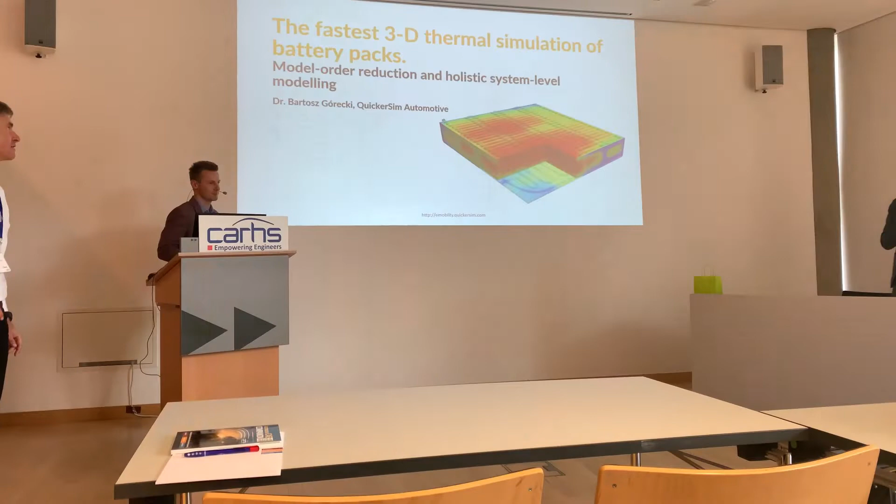Okay, perfect. So the name of your company is QuickerSim. It is QuickerSim.

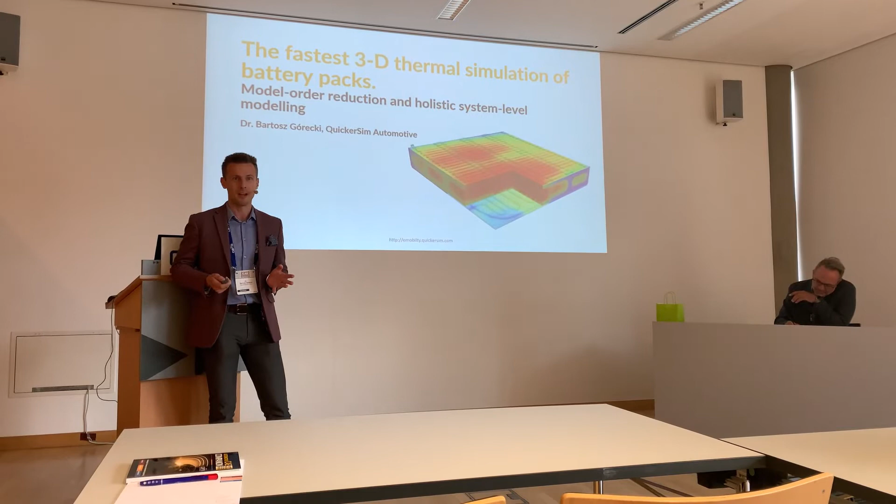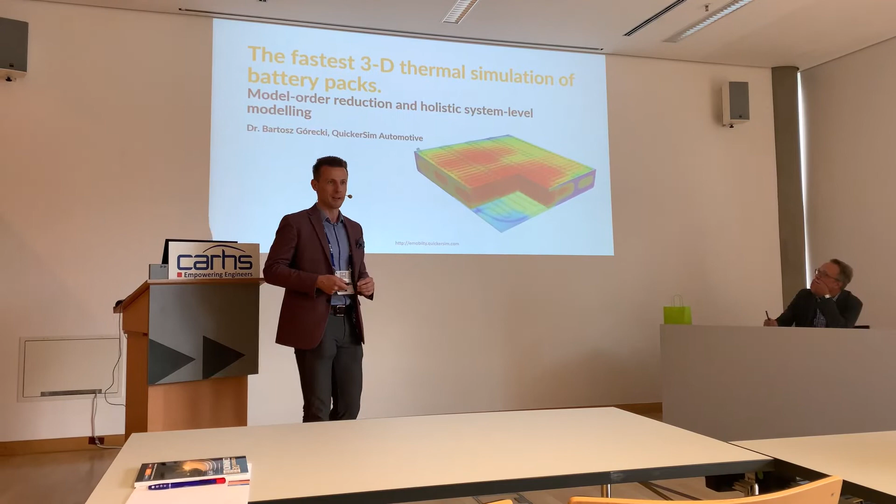I think the title of the presentation is also a bit provocative because it says the fastest 3D thermal simulation model of battery packs, and there's always a good question: what is the best, the fastest, and should you really trust words like that? But I hope that you will be pretty much convinced with this presentation that at least it's not the slowest one you can find.

Our company is called QuickerSim, and we've always been focused on solving these simulation challenges quickly. Let's be quick this time as well, and let's start with the conclusions. This should get some attention because we're just before the lunch break, and it's difficult to get your attention probably.

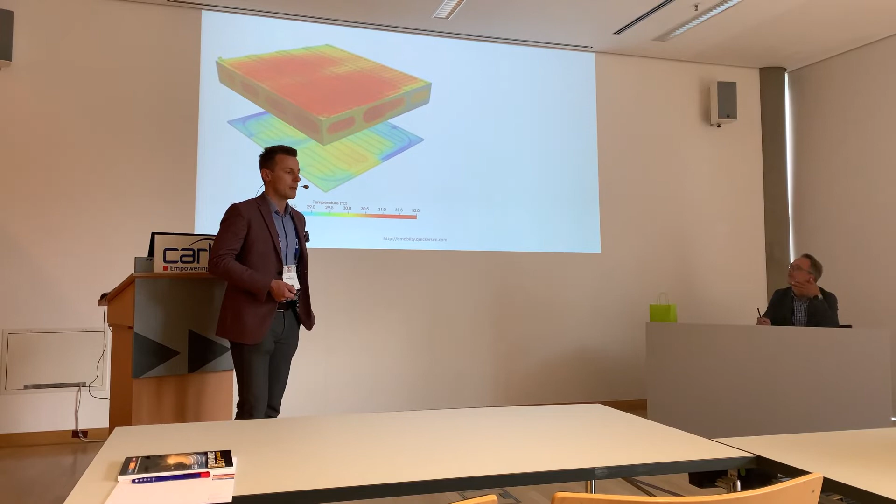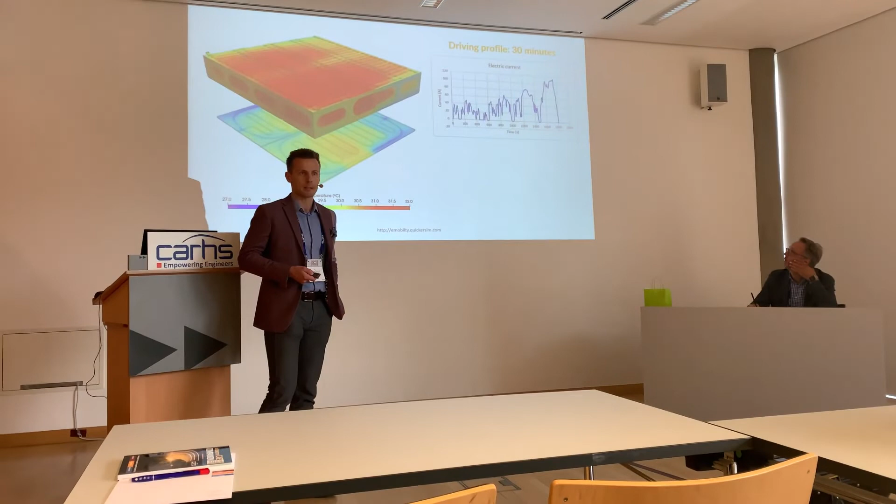The conclusion is that if you're interested in thermal modeling of a battery pack like this—I call it already pretty complex—and you want to take into consideration all the geometrical details of the battery pack, and simulate 30 minutes of the driving profile, so having a three-dimensional thermal simulation of a battery pack for half an hour of driving...

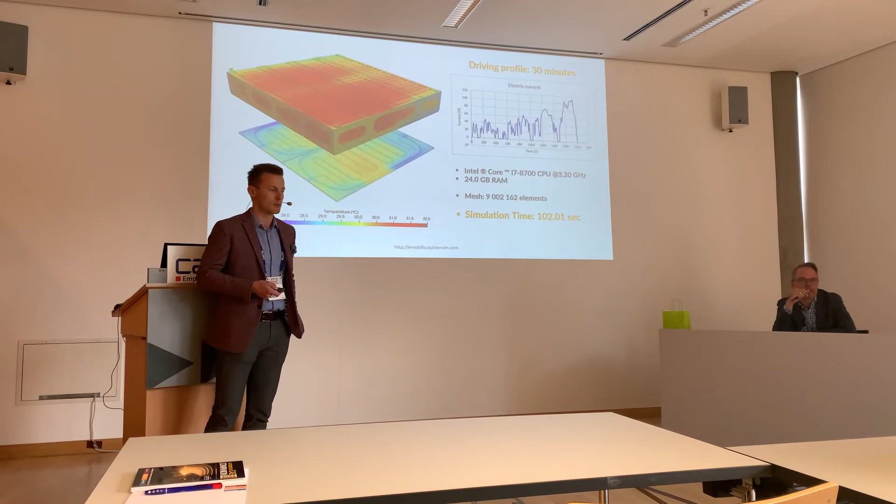Let's have a look at how long that should take if you take a pretty usual desktop computer and generate a mesh that consists of 9 million elements. What would you expect? Three years, or even more. It's actually 102 seconds, like 1.5 minutes. I will try to explain in the next slides how we do that and how that's possible.

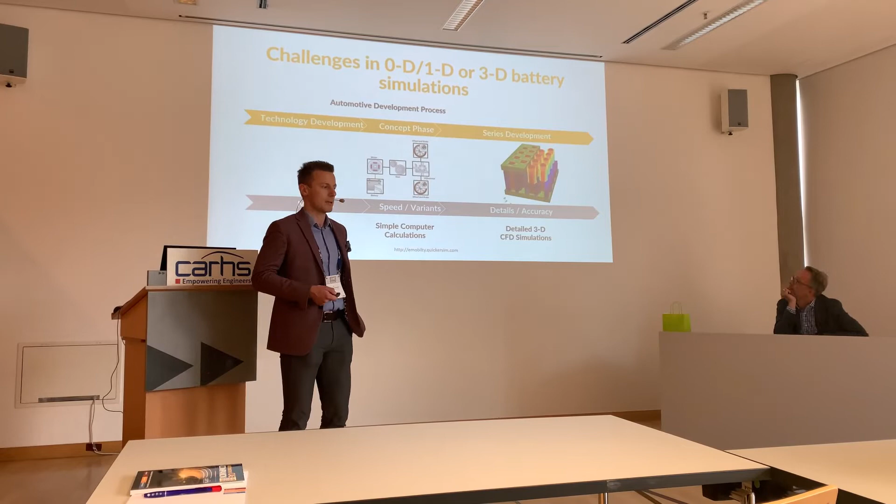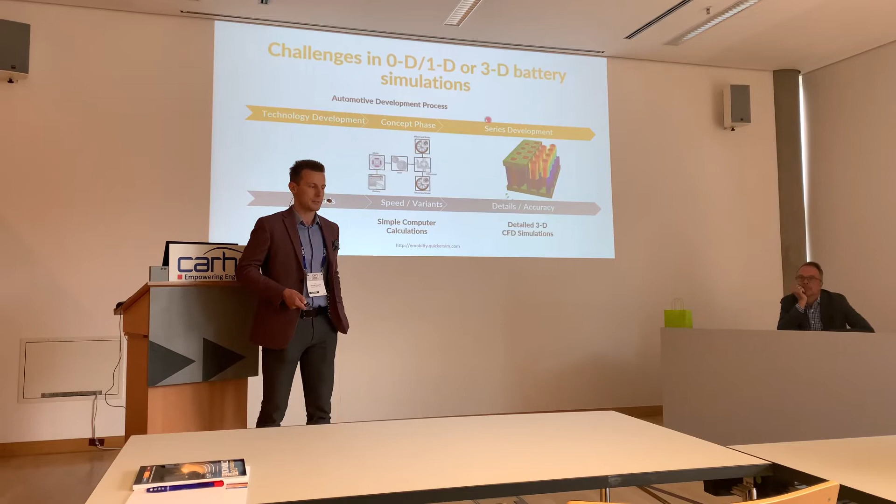Let me first relate to what is the CAE Grand Challenge of battery simulation. When speaking to different OEMs and our customers, what we see very often is that the challenge is really connecting things that happen in the concept phase—here we usually speak about 0D, 1D simulation—with something that happens in series development, where accuracy mainly comes into play, and there's a large need for 3D CFD predictions.

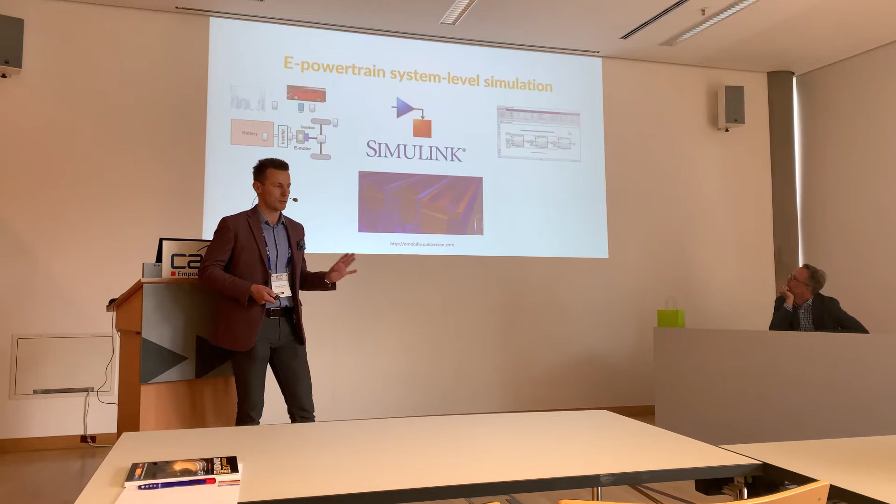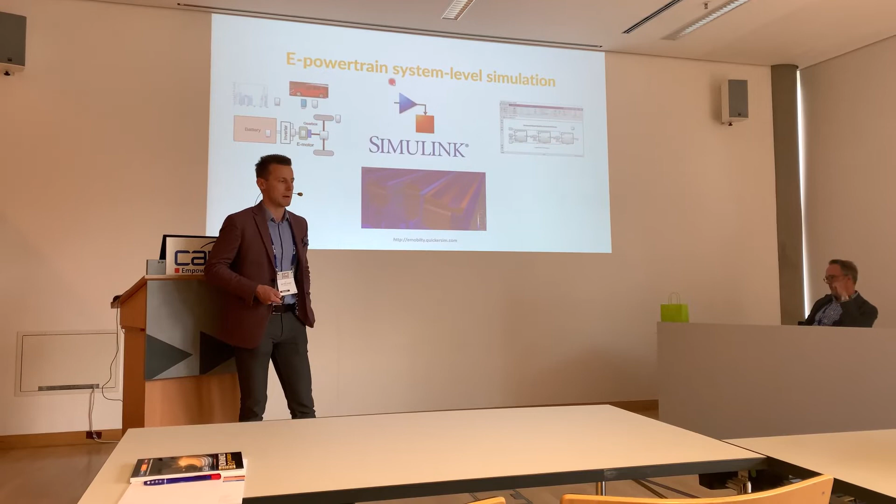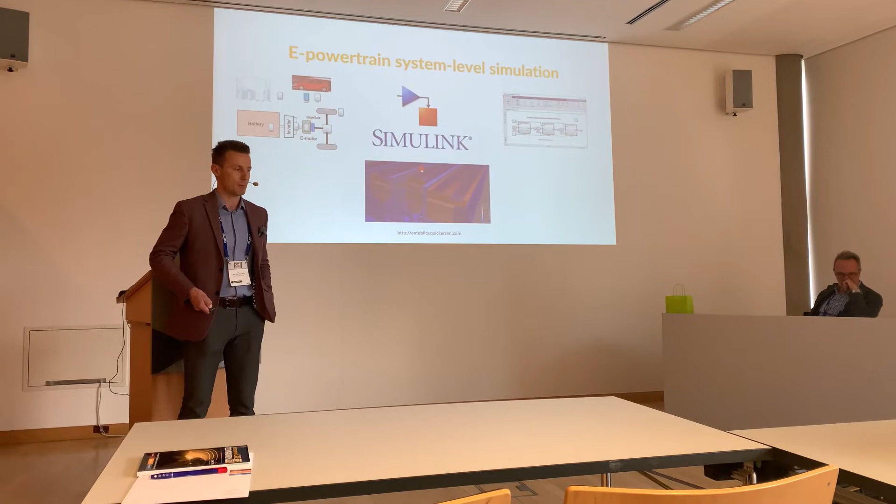But to be honest, that's not the largest challenge. The largest challenge will come in a minute. However, when talking about 0D, 1D simulations, we typically speak about electric powertrain system-level simulations. Very often the OEMs work with MATLAB and Simulink. The challenge is how you should relate to your CFD results if you design the system—you work with meshes like that—how should you input the data from your very detailed 3D CFD simulations into system-level simulations of the whole electric powertrain. I hope we do have the answer to that.

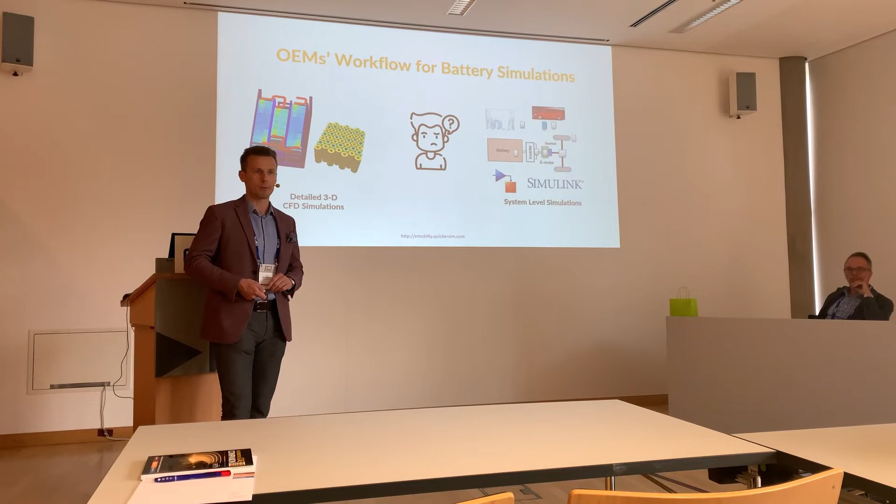The story we heard from one of the German OEMs we currently cooperate with is that they obviously have departments working on these 3D thermal simulations. They also have people working on system-level simulations, and the largest problem is how you should couple one of the approaches with the other one.

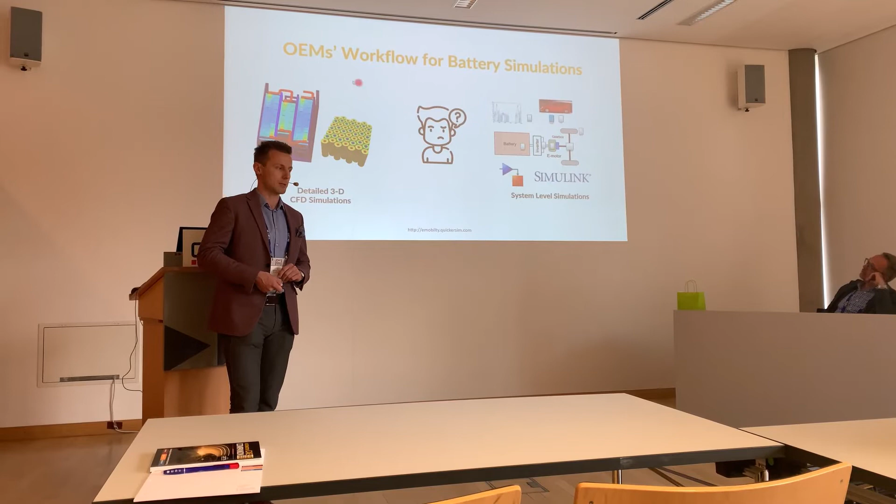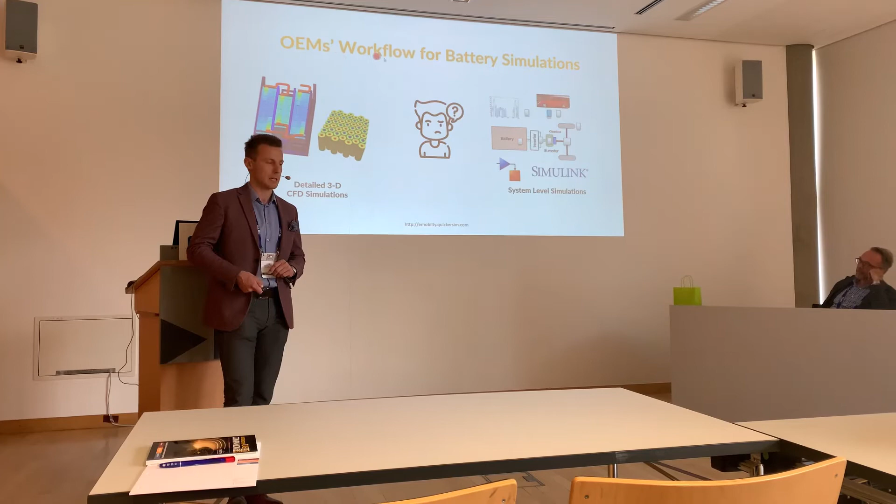What they've shared with us is that when they do have the results of these simulations, it takes 2 to 3 months of manual work for the engineer to translate the results from 3D simulations into anything that can be used on the system level with proper accuracy, because when they just take it, there's things like response surface models, etc.

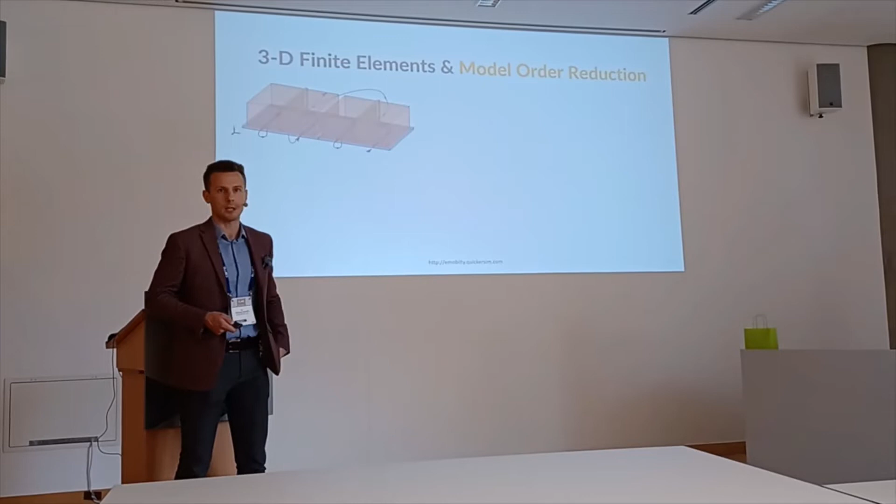We could use one more, maybe very similar technique for reducing the model that I'm going to present right now. Let's focus first on what a typical CFD solver would do if you were in the position to solve a thermal transient simulation. Typically you'd start with the CAD geometry, then generate some mesh, probably much more difficult than that, and you'd expect to get temperature results like that.

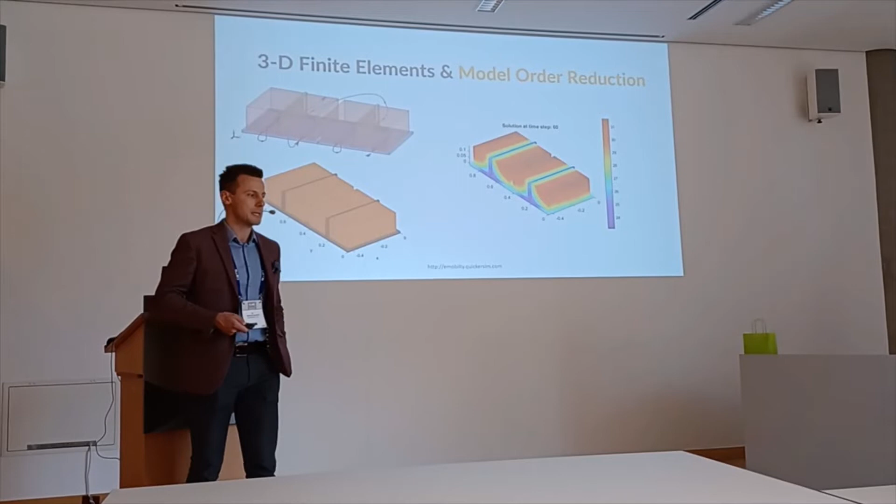So what happens underneath is the CFD solver needs to solve the partial differential equations for heat transfer. It also needs to solve the Navier-Stokes equations for flow if you've got any kind of flow inside, in cooling channels, if you've got active air cooling, etc. It typically uses one of two discretization methods: either the finite volume method, like ANSYS Fluent or STAR-CCM+, or the finite element method to discretize these partial differential equations, as most structural solvers do.

If we're speaking about the finite element method, then you need to represent the temperature at every instance in time, at every node in your mesh, and you use, for example, linear shape functions to approximate the solution between the nodal values.

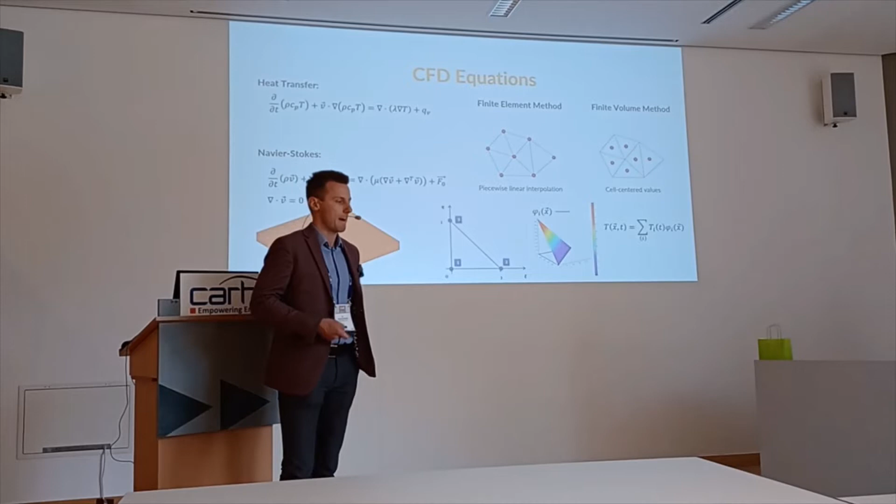In the discretized version, we've got the matrix notation with the mass matrix representing thermal inertia, the convection matrix representing convective phenomena, the diffusion matrix representing heat conduction, and the heat source, which when we're talking about battery packs would typically represent heat generation in the cells.

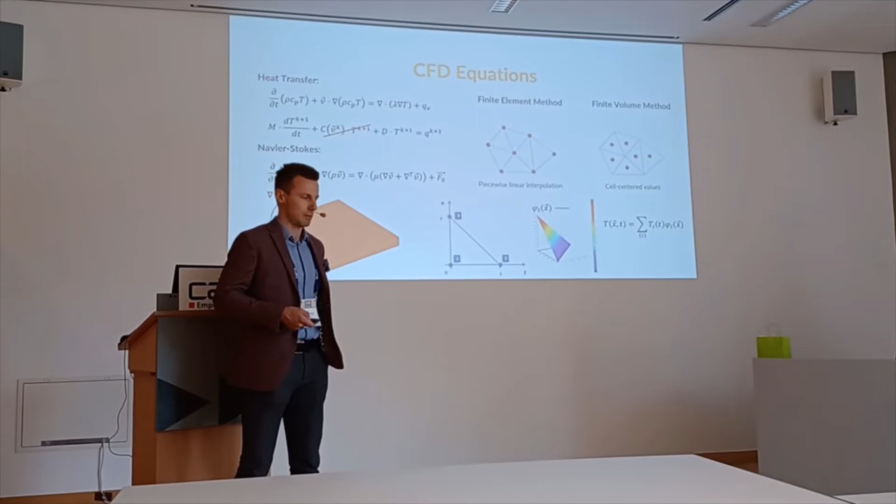Just for the sake of simplicity of explanation, let me drop this convective term. We do take this into account, but it's much more difficult to understand within just a few minutes, so let me drop that and show you the idea that is generally behind the model order reduction.

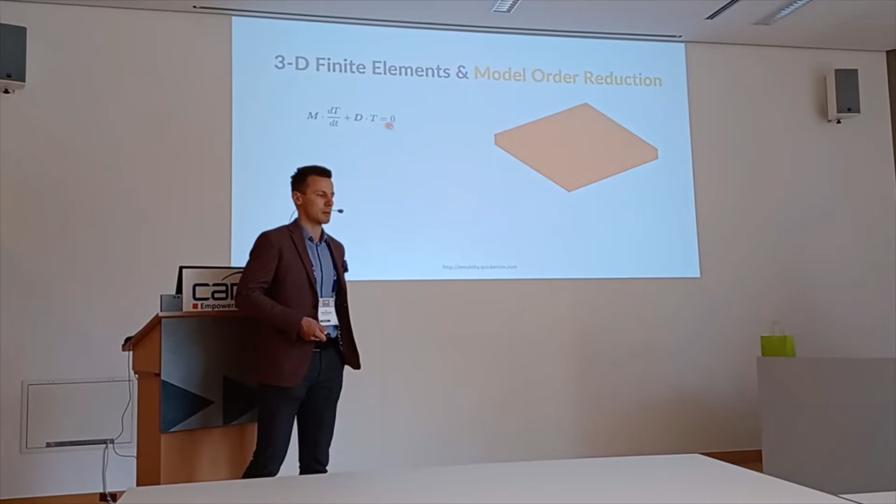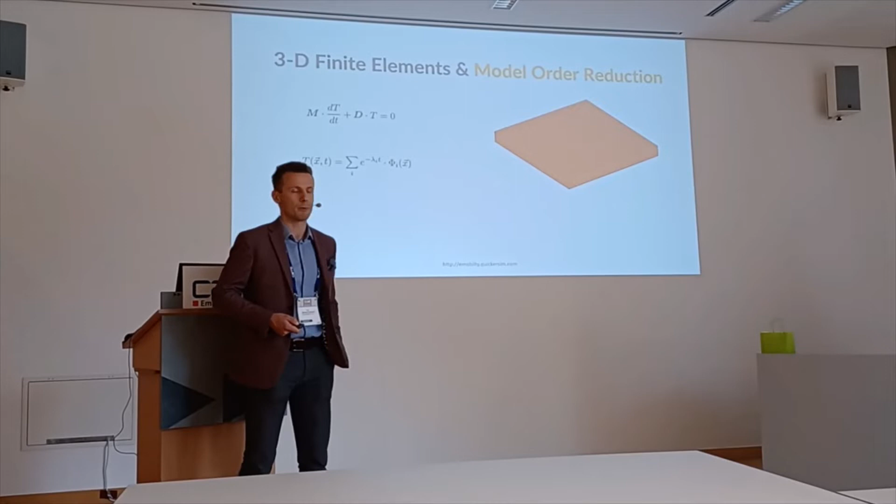So let's limit our problem to just having the thermal inertia and heat conduction. To be honest, the heat source on the right-hand side does not change anything in the approach, so I've just omitted that. If you remember the trick from partial differential equations, you can simply assume that you can represent your function as a decomposition.

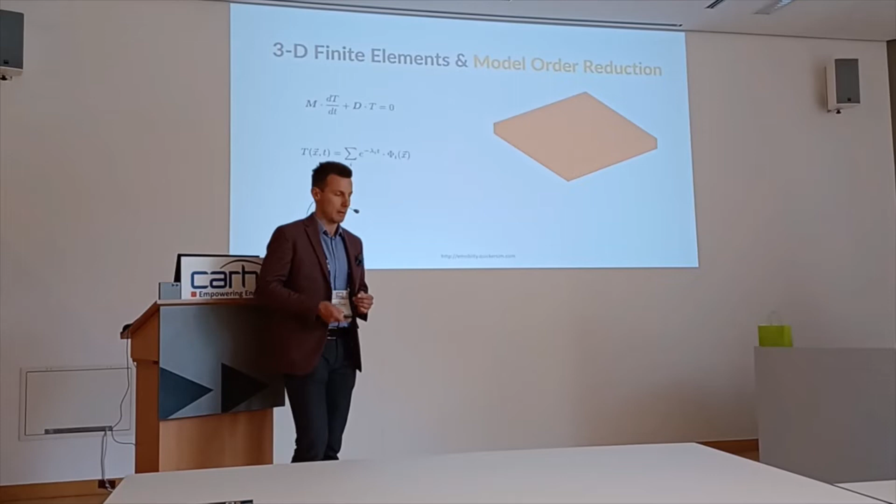You represent your function as a series, where you decompose your function into a product of a function that depends only on time and a function that depends only on space, and you substitute this into the original equation. What you end up with is the generalized eigenvalue problem.

We exploit this concept to run our model order reduction. To be honest, that's something you should be very familiar with, especially those of you who work with finite elements in the structural context, because you do that very often for structural simulations.

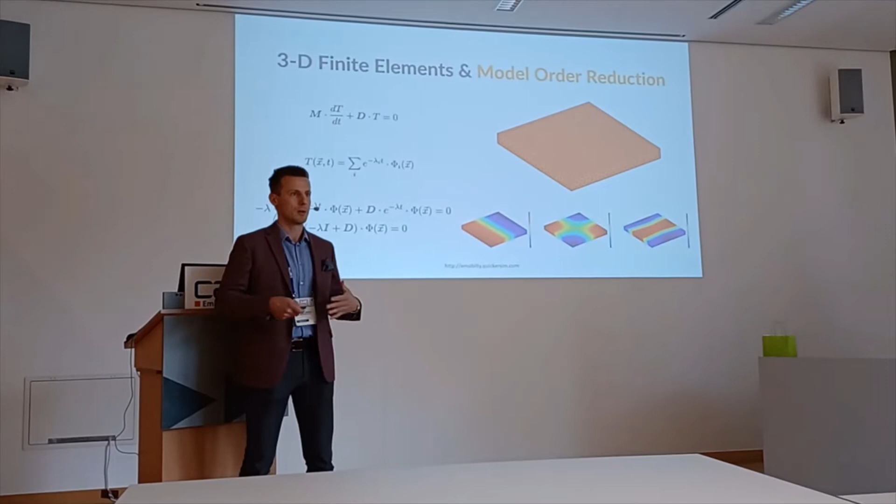If you want to calculate vibrations for dynamic response, you usually do not calculate the finite element response explicitly. What you very often do is generate the eigenmodes and eigenfrequencies of vibrations, and you solve your dynamic problem in this eigenvector space.

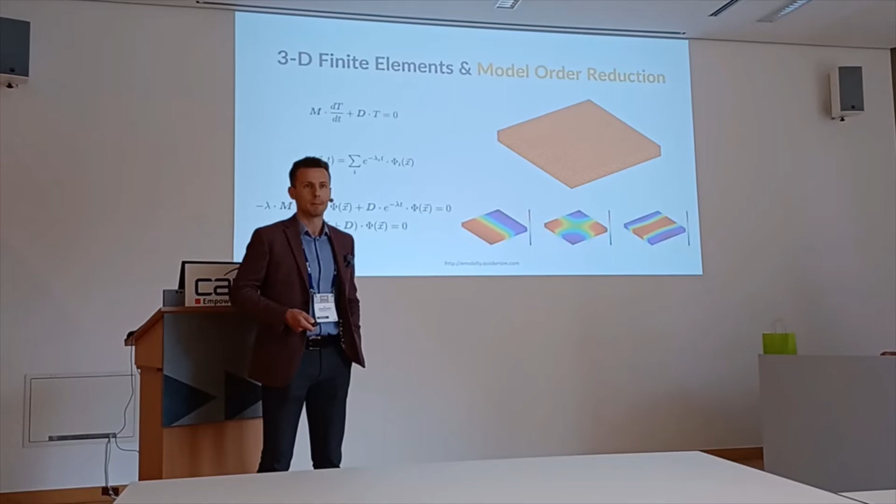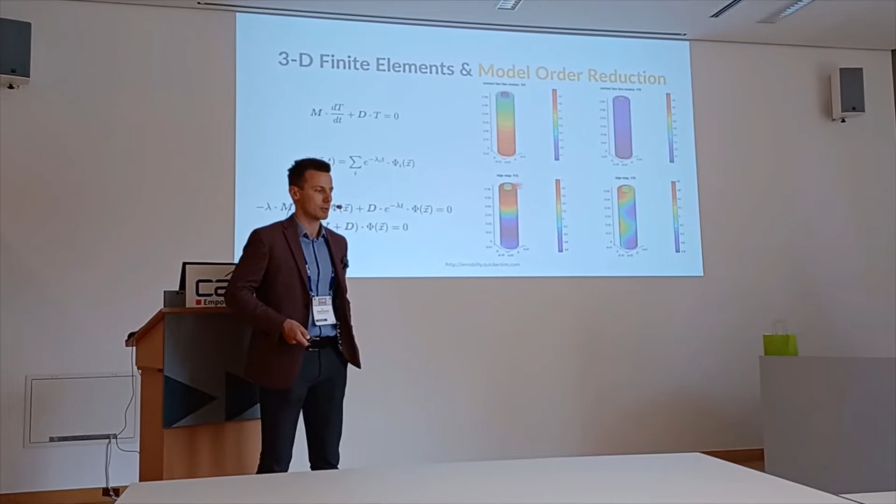And we do the same, but for thermal problems. What you can see here is just the depiction of a couple of exemplary eigenvectors, or thermal eigenmodes if you wish, something that does not exist in physics, but you can generate them mathematically and use them as the algebraic vector space for model order reduction.

So basically, we use such eigenvectors to approximate all the 3D temperature distributions that can occur during the time evolution of the battery pack simulation.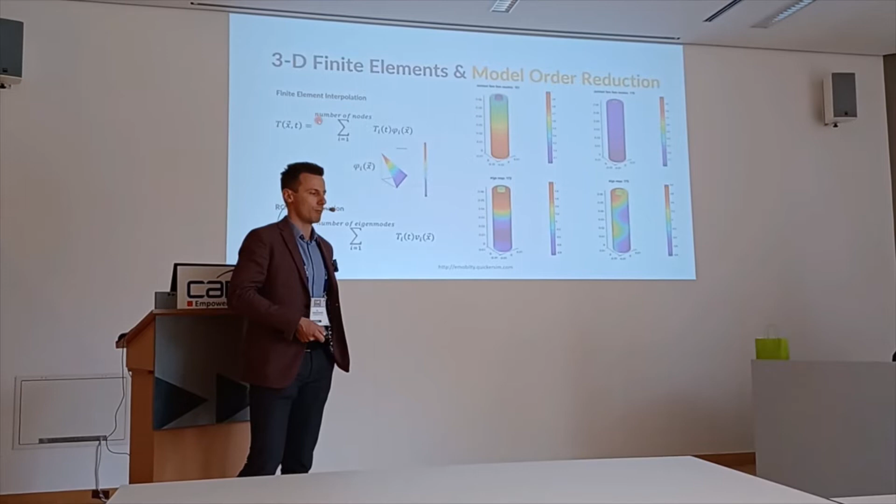What's the advantage? The advantage is that we vastly reduce the number of degrees of freedom for which we need to solve. Typically, the finite element code would need to solve for all the temperature values at all the nodes in the mesh, and it would need to do that for every time step.

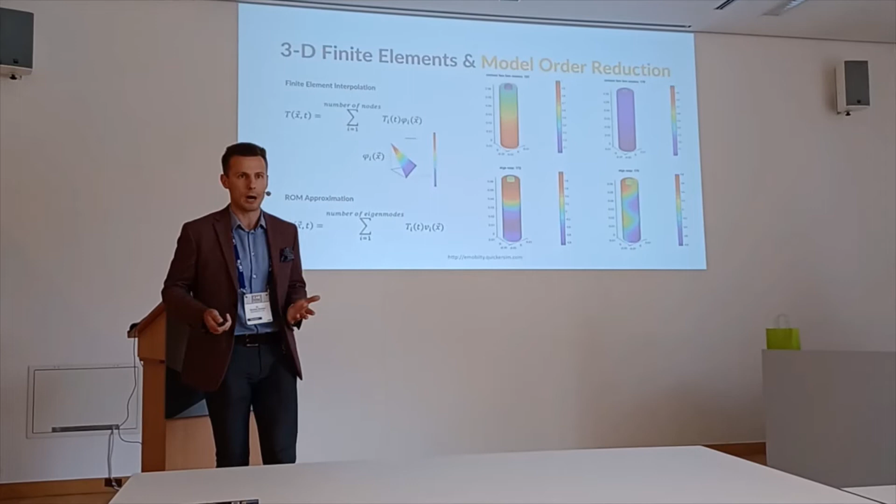We need to do that just for the number of eigenmodes that we select, and we can freely select how many eigenmodes we want to take per component. Well, then we get many more eigenmodes because we've got many components, but it's usually like 100 times up to 1000 degrees of freedom less than the original formulation.

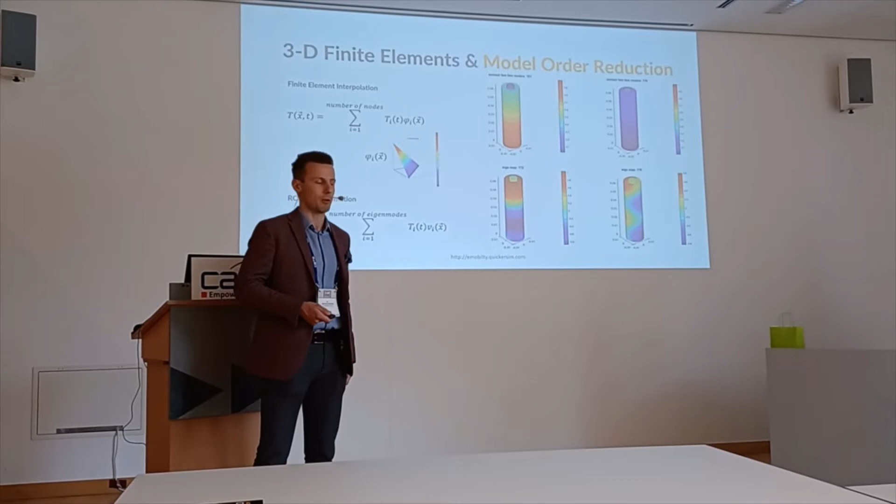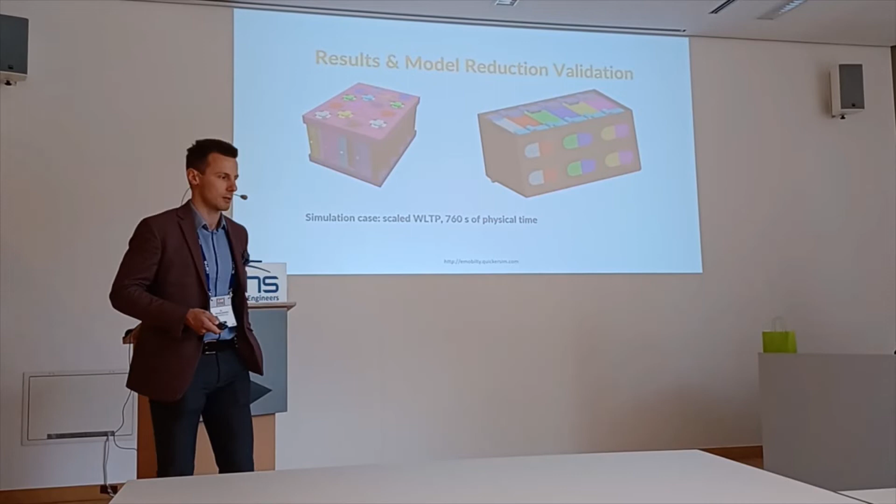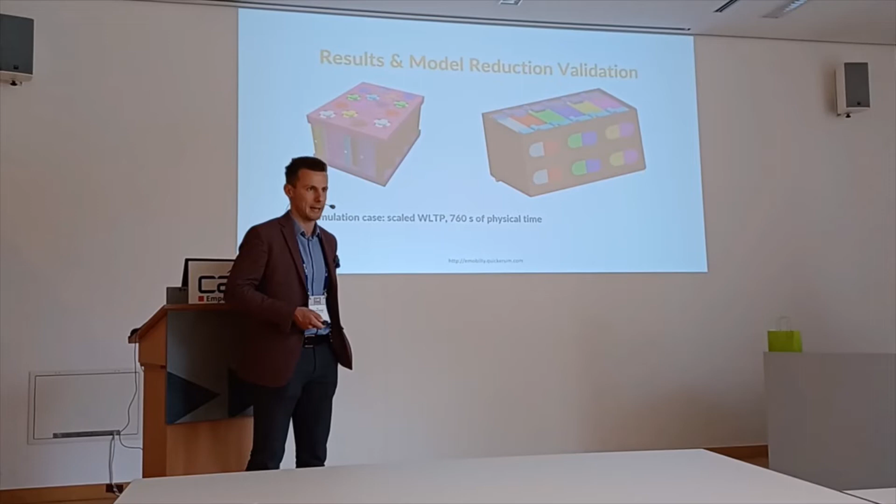What are the results? The results are probably the most important part of this presentation, and I will underline a couple of things here. We've started with really a toy problem. I would say it's not an automotive battery pack, it's an academic case to just study the numerical accuracy.

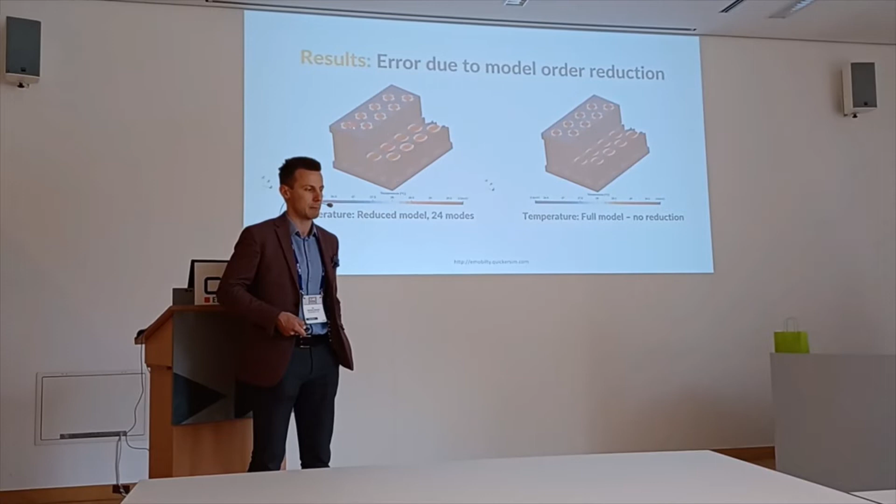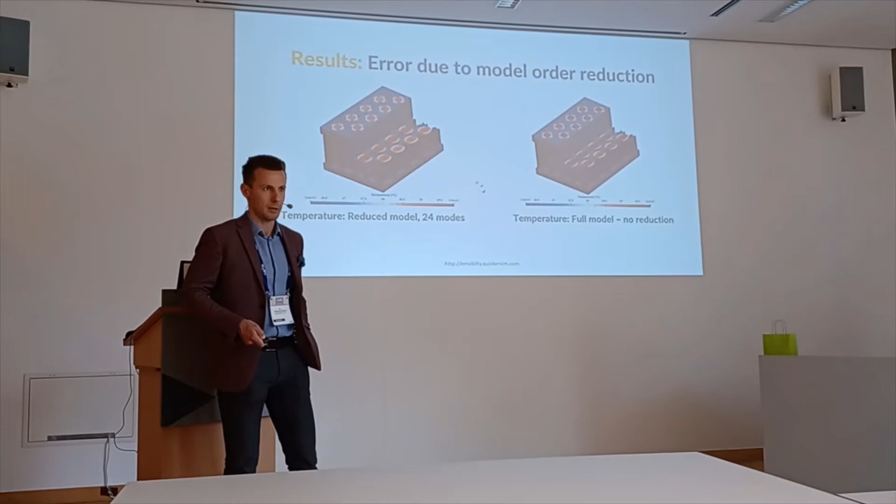We've checked the error that we introduced due to having the model order reduction. On the right hand side, you can see the full finite element model simulated without any model order reduction. On the left hand side, this one with model order reduction, with 24 modes per component, so for each cell, for each mechanical component, probably altogether like 1000 degrees of freedom here. Well, you will see differences. This red color here is different from this red color here, but I wouldn't say these are large discrepancies.

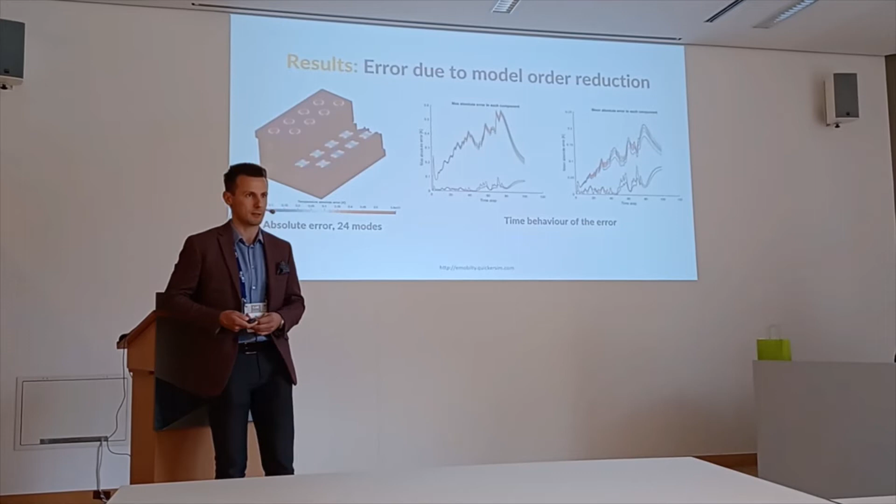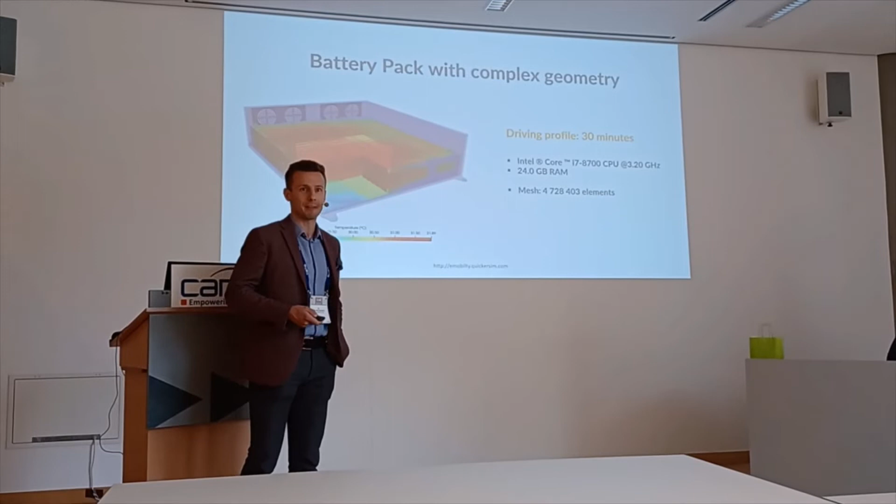What's next? Let's take a more complex geometry. If we take that, I have already spotted at the beginning during the conclusions phase. We do have 3 different meshes, so I've taken the medium one. Right now it's not 9 million cells, it's almost 5 million elements. And let's see what happens.

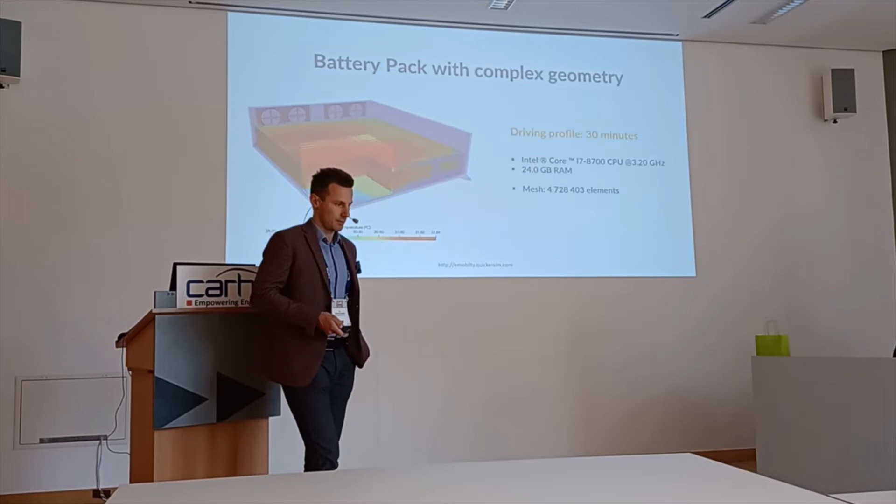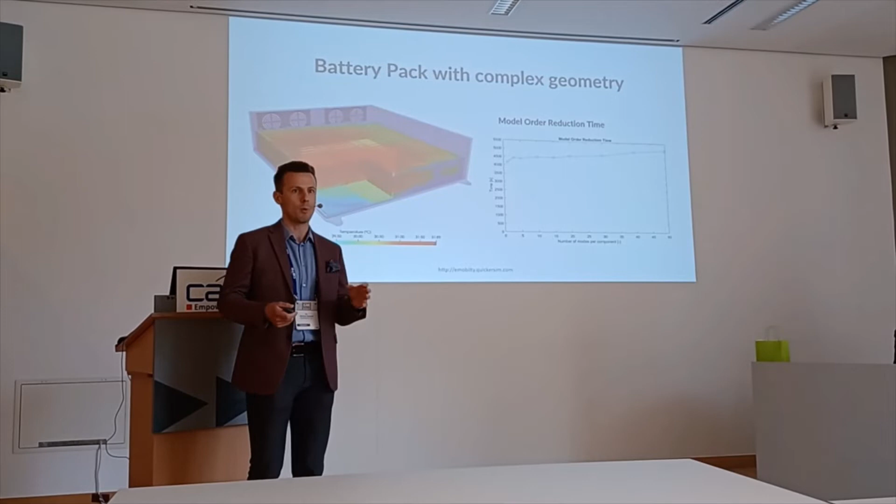First of all, you need to agree that we need to have some kind of pre-computation phase. Every time after you change something to the mechanical design, all the mechanical properties, it's like if you have designed a new battery pack, you need to run model order reduction. But if you want to change the boundary conditions, the driving profile, the external temperatures, etc., something that happens to the operation, you don't need to run this model order reduction phase.

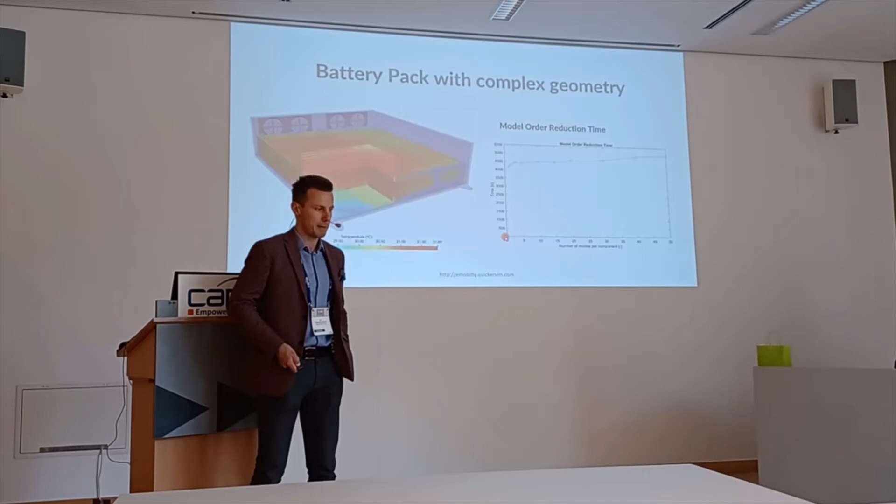So pretty much you do that just once after you have modified the battery pack, and then you're ready to use that. How much time do you need to spend for that? Depending on the number of modes that you select, well, usually something between 1 and 1.5 hours. That's something that you need to spend in advance.

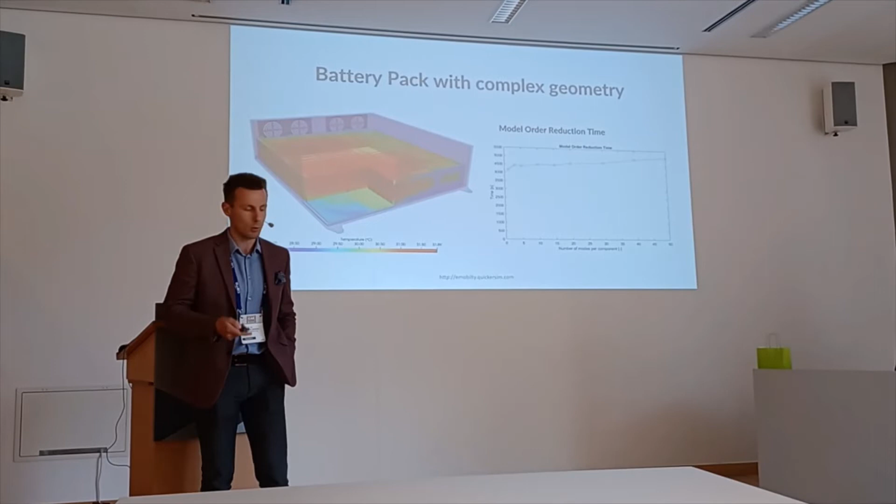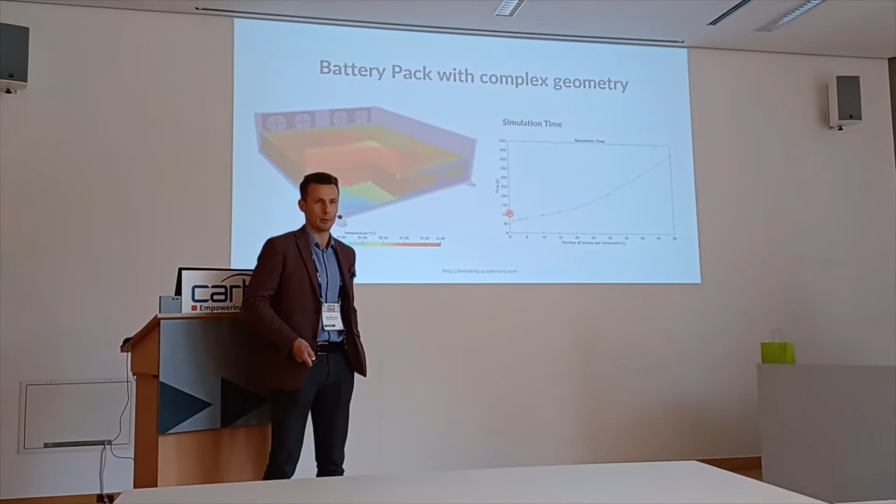But how quick is it later on? If you want to run the simulations, depending on the eigenmodes per component that you select, well, the simulation time for half an hour of the driving profile varies from, let's say, 60 seconds to maybe 400 seconds.

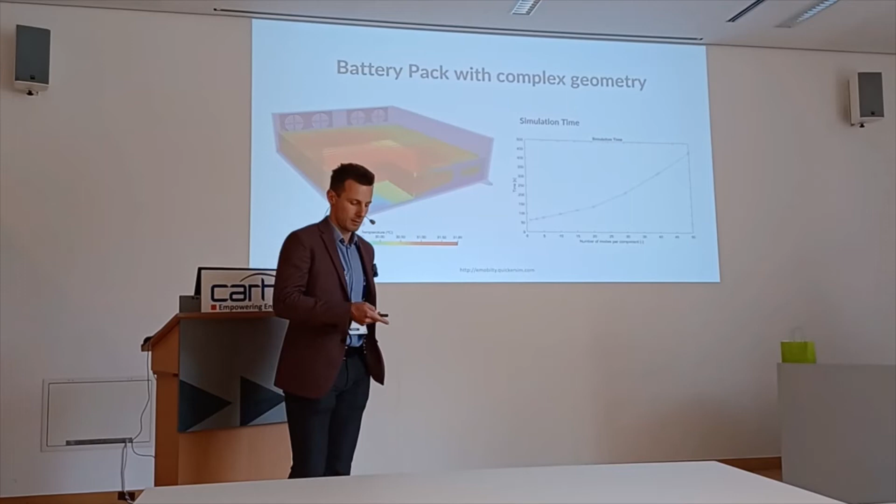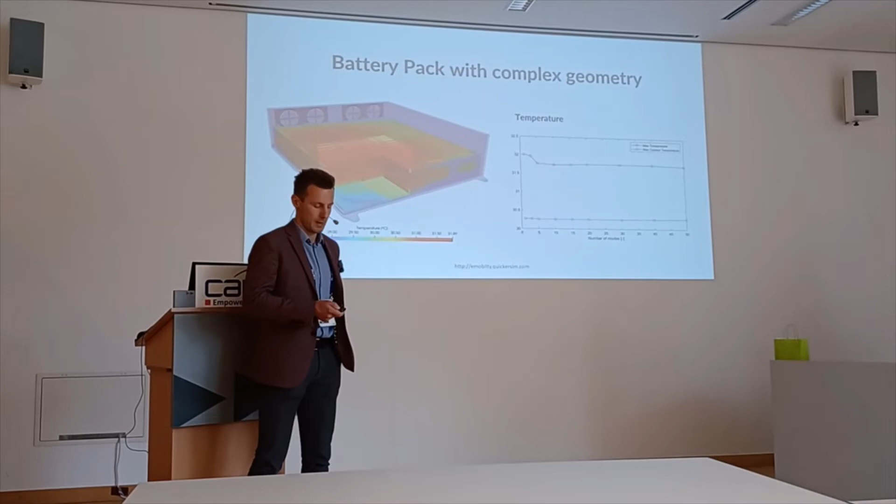These are the results that we got for this battery pack. In many situations, we are below real time. If we've got very complex geometries, maybe we're a bit above real time. But compared to 100 CPUs on a supercomputer and 2 days of computations or even more that a CFD run needs, we still need to use that, it's an advancement. What is important, then we need to have a look at, can we trust this result?

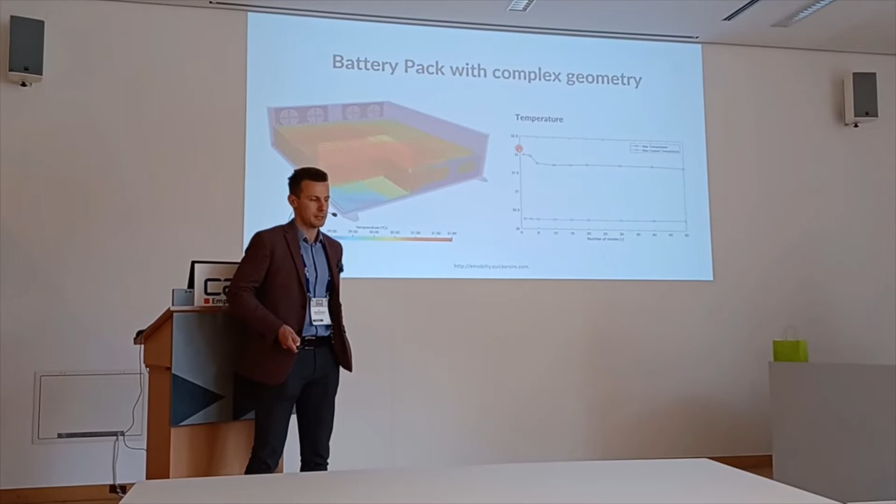So, well, if we take too few eigenmodes, well, the differences are not large, but there is some discrepancy. So usually we need to take 10 or more eigenmodes per component, and then we are pretty much sure that this result should be fine.

What's next? What's the impact of the mesh? We've compared what happens if we take 3 different meshes. One of them is pretty coarse, the other is a medium one, and the finest is 9 million elements. What's the impact of the mesh? Well, visually, you probably will not see any differences between the temperature maps. If you have a look at the values, they are very, very much the same.

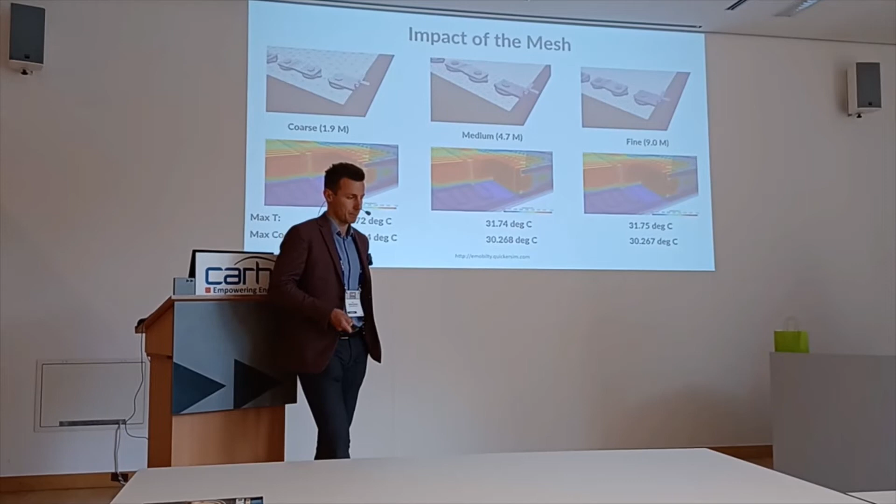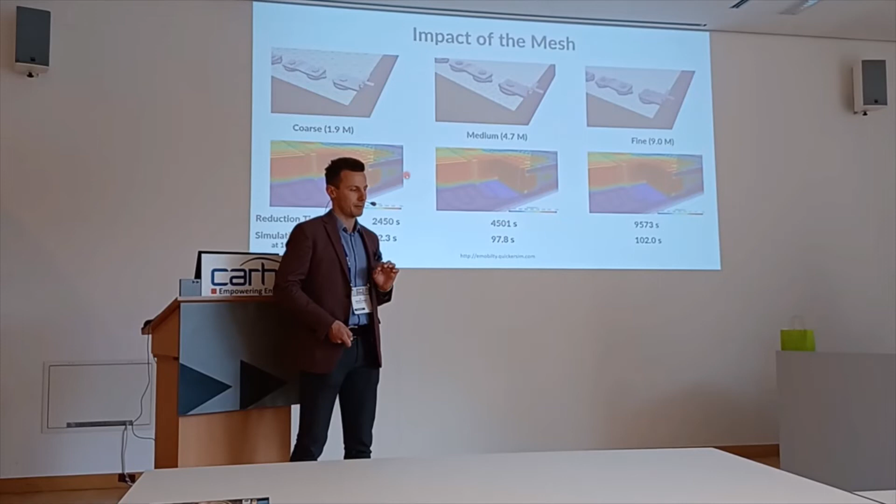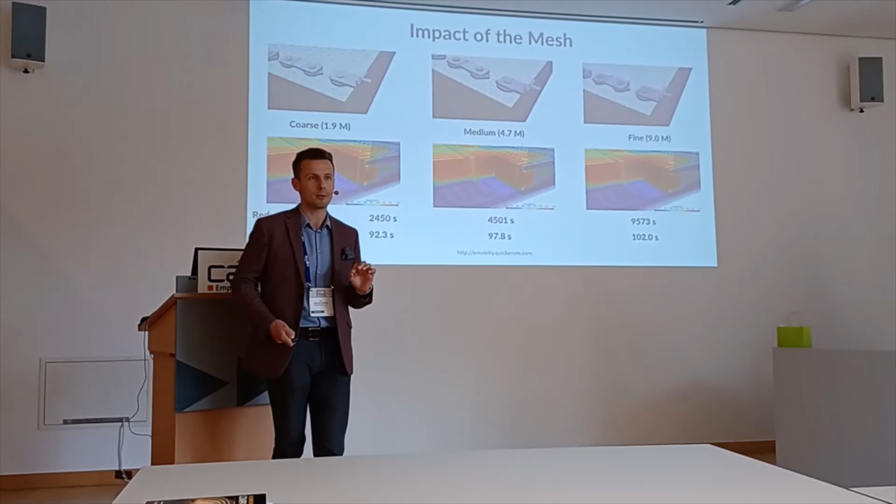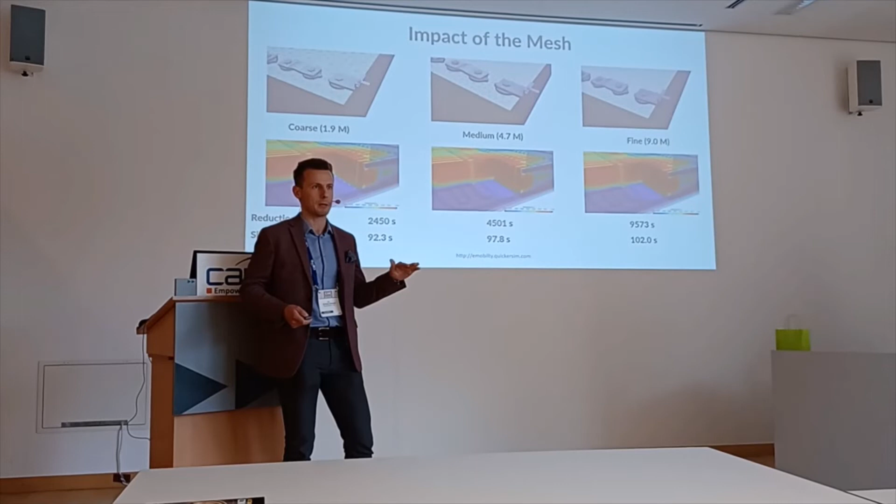What happens if we compare the simulation time? One important thing: if you get a larger mesh, the model order reduction time will be longer. You need to spend more time for a larger mesh. However, once you have reduced your model, because you work in the eigenvector space, you basically have more or less the same number of degrees of freedom. We do some tricks on the contact, so this might not be exactly the same, but it's pretty much so. Even if you want to investigate plenty of geometrical details in your mesh, you end up with a simulation time that is actually almost constant.

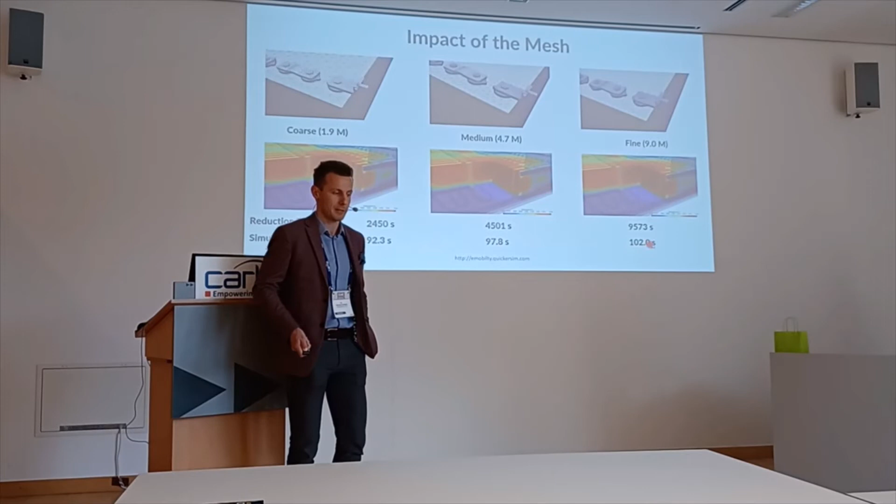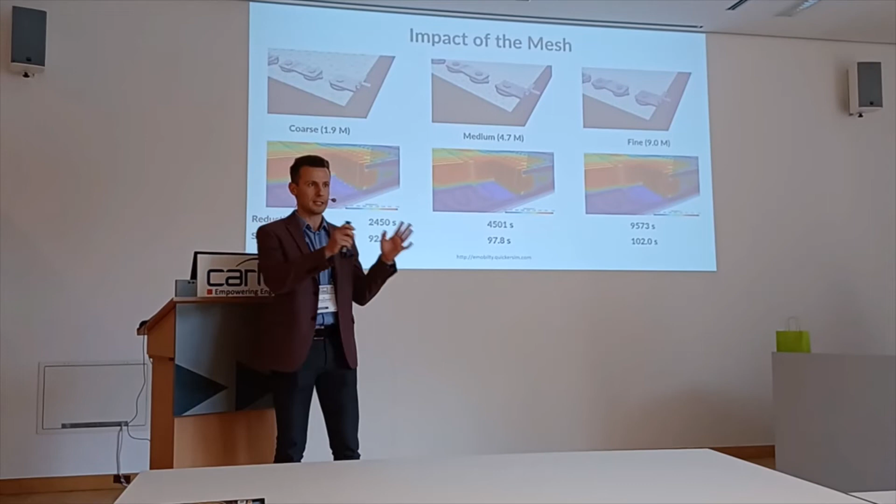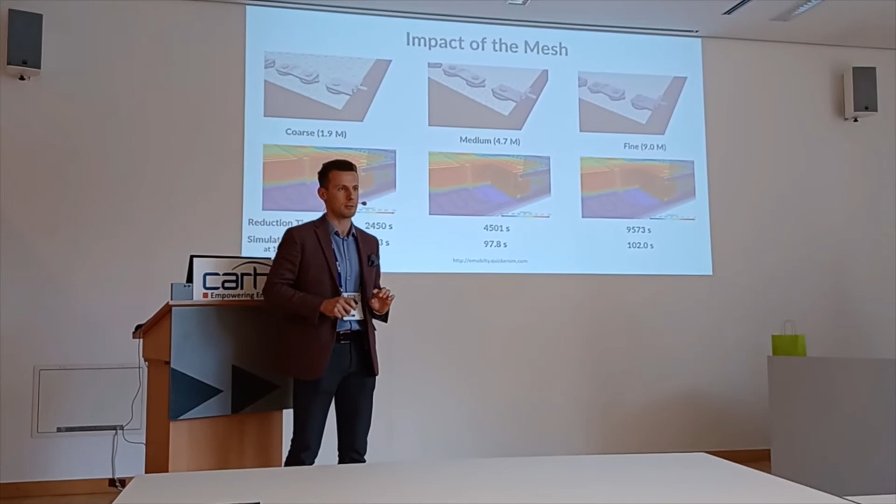What it means is you can build a 3D simulation model based on the CAD geometry, regardless of whether it's a very detailed design or a 3D design in the concept phase, and you can take it to a very small Simulink block in the MATLAB Simulink simulation and run system level simulations, having the full 3D fidelity and accuracy of the results.

Verification and validation. At the beginning of the development of this code, we cooperated with Solaris Bus and Coach. Some of you might know Solaris—they're not the largest bus manufacturer, but they turned out to be the largest electric bus manufacturer in the European Union, having produced approximately 1,000 electric buses. All of them monitor every second, 50 to 100 parameters. So what we did with them is compare the results from QuickerSim, our software, with their online monitoring of the batteries of the buses and experimental testing as well. We also compared that against simulations in ANSYS Fluent.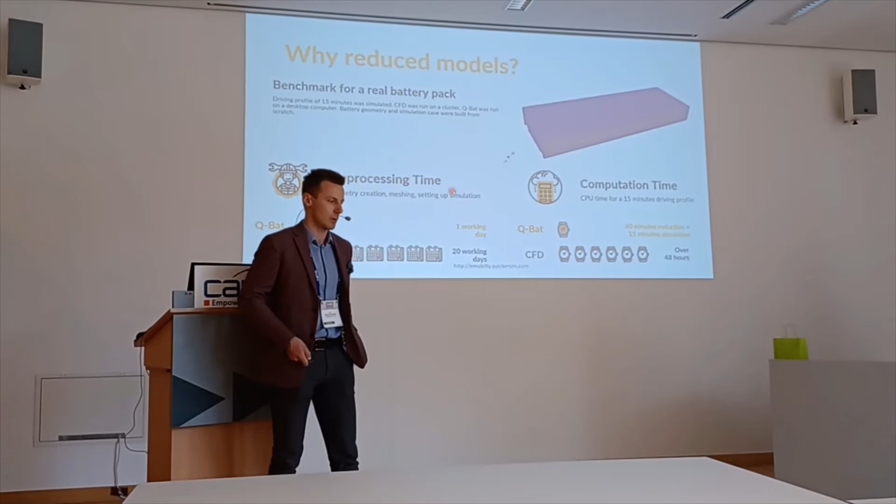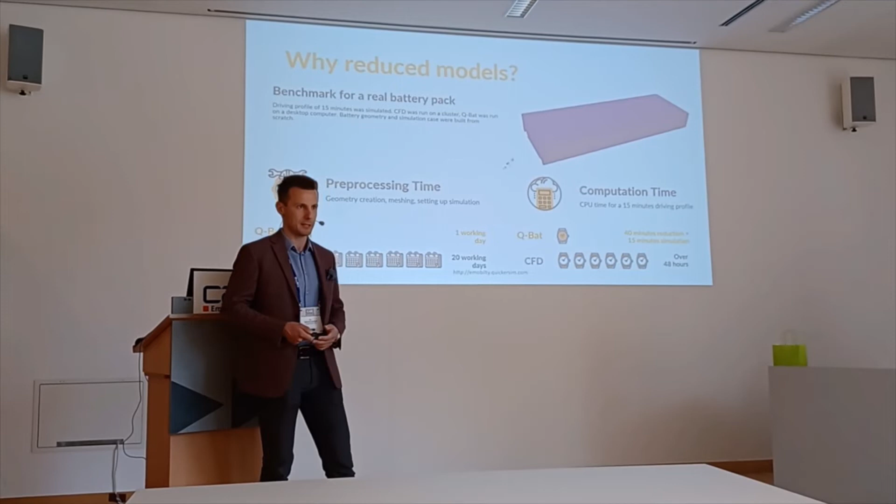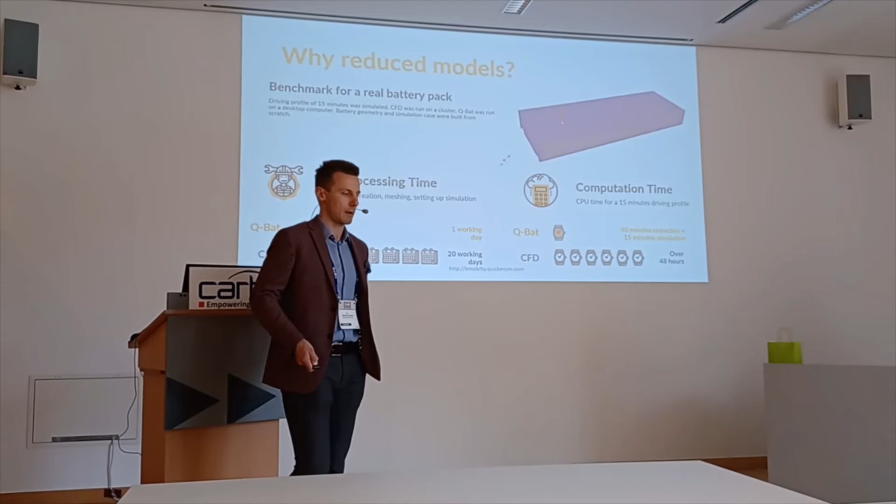Pre-processing time is cut down mainly because Q-Bat isn't magic—it's simply designed to simulate only batteries. So I would say the model preparation is much easier than taking a general purpose CFD solver and simplifying the geometry, generating all the meshes, etc. However, the computation phase is important. Just one module of the battery pack of an electric bus, 96 electrochemical cells inside, 15 minutes of the driving profile: we needed 40 minutes for the reduction phase, 15 minutes for the simulation phase, whereas ANSYS Fluent on 100 CPUs required 2 days, already with some simplifications, and it hasn't been a fully transient profile. We did some tricks to have ANSYS Fluent quite quick, because otherwise this would have taken months probably.

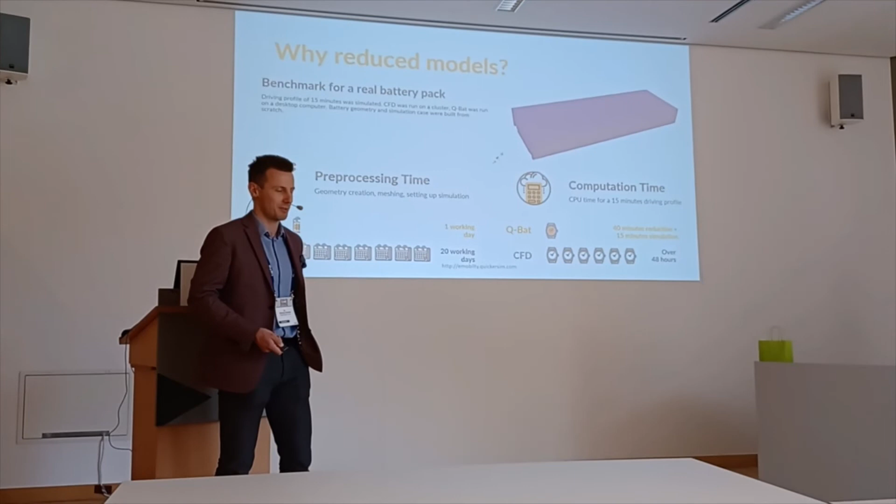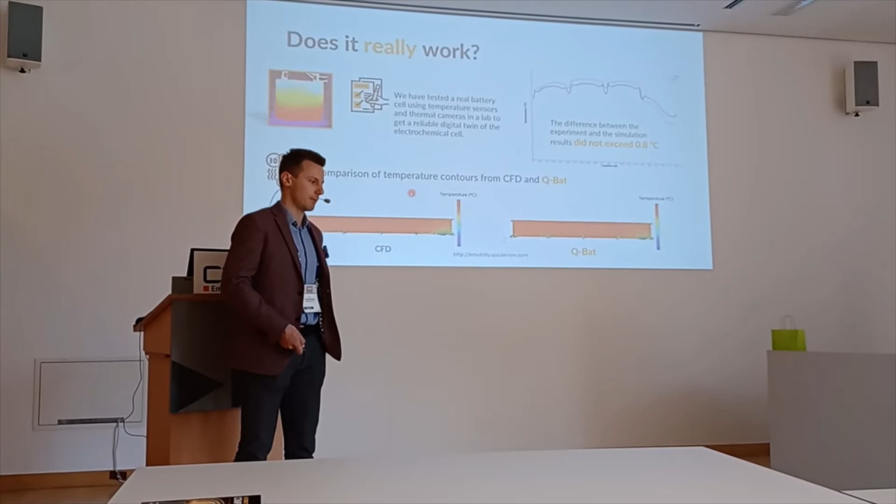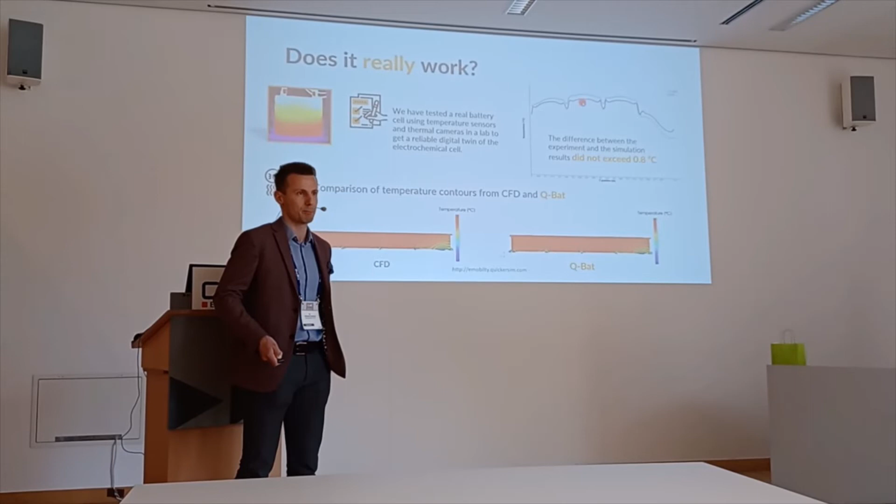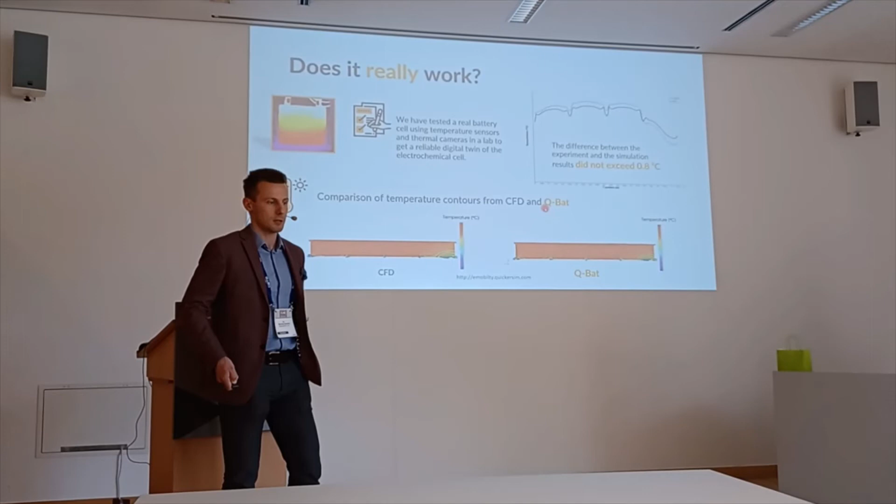Does it really work? Again, you will see the differences. This one is CFD from ANSYS Fluent, finite volume solver, versus Q-Bat finite element solver plus model order reduction. You will see some differences. I would say the discrepancy is probably not very large if you take one of the lines at the cross section, and it's not even a properly selected line. If you compare that, it needs 2 days on 100 CPUs, while this needs just 15 minutes on a desktop computer. The same applies for the cold plate.

Let's come back to what is the CAE Grand Challenge of battery simulation. As I said, we see that many OEMs struggle with how to couple the CFD analysis that they carry out in some departments with the simulations that completely different departments carry out for whole vehicle simulations and electric powertrain simulations. So there's the solution.

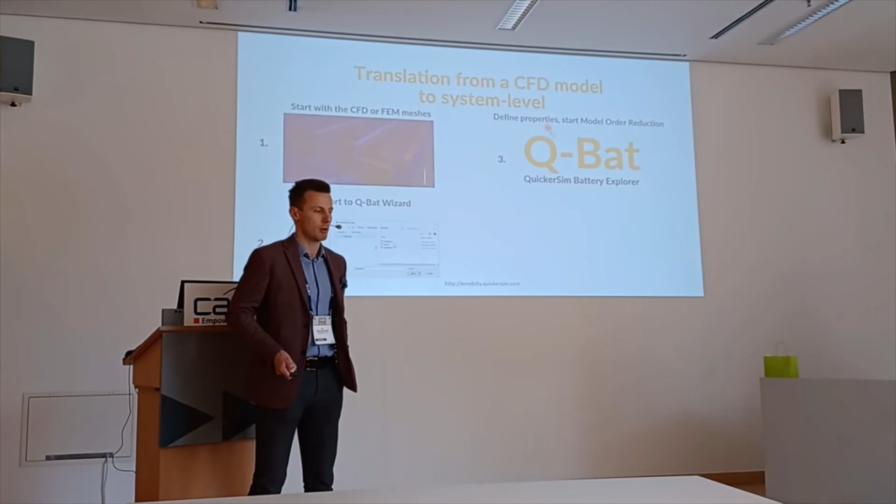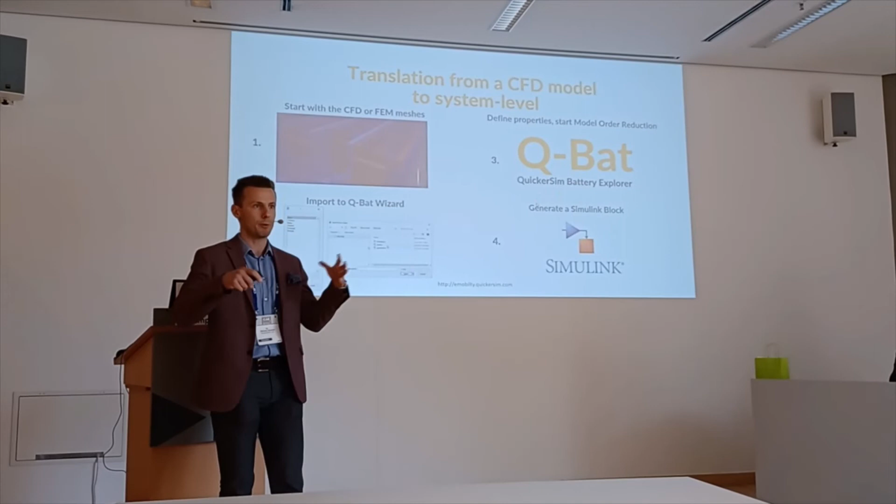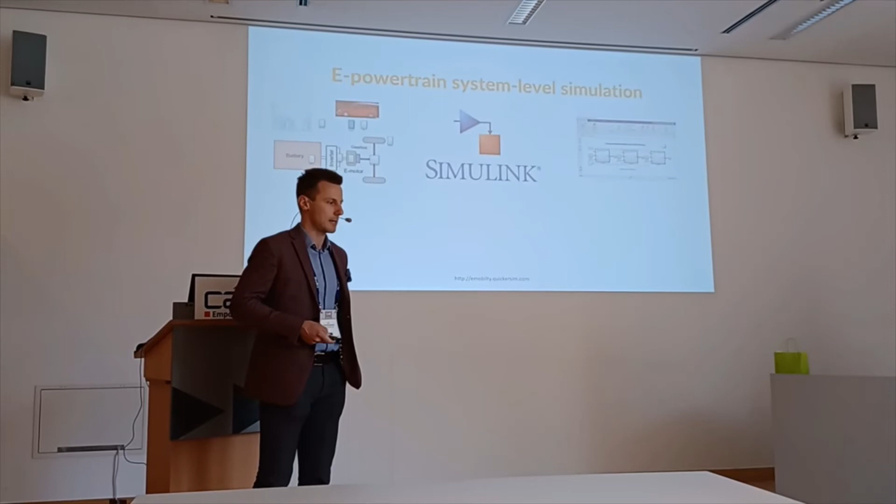Typically these OEMs already have simulation departments and CFD meshes. So let's start with the CFD meshes. Then import it to Q-Bat using the wizard we've created, which automatically detects many of the components and thermal properties. Then define some properties in Q-Bat, start the model order reduction, which happens automatically. And finally, you can leave it in MATLAB, or you can generate a Simulink block if you want to use the 3D thermal battery simulation model in a Simulink environment. That's fully possible—something we currently test with one of the OEMs located here in Germany, in the south of the country. I think the most amazing part is that in a system level simulation in Simulink, you can embed basically a CFD simulation running on a mesh with a few million nodes.

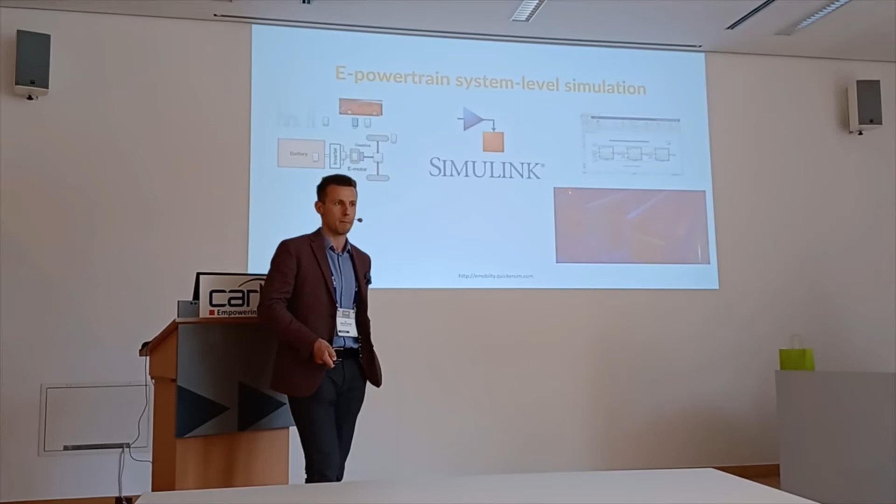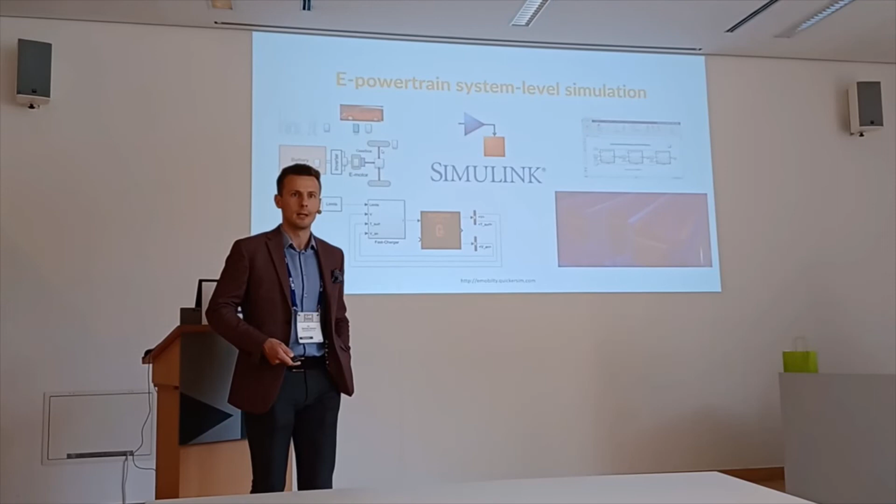We do have integration with BatEMo cells. If you know the BatEMo company that originates from Karlsruhe, they have very good simulation models of the cells. So they take care of the cell modeling, we take care of the proper battery pack modeling. Some integrations I mentioned—MATLAB and Q-Bat already tested, and we are a product partner of MathWorks. We have also worked with Simscape, where Simscape can solve the electrical part of the battery and we can solve the thermal part. The same applies to Batimo, GNS, and MSC Nastran formats—these are basically the mesh formats that you can already import to Q-Bat. These two formats usually also allow us to import meshes from STAR-CCM+ or ANSYS Fluent indirectly.

Developments to come for a European funded project that we have at the moment: development of the simulation models of battery degradation. That's a large research project we have right now. And a smaller one, but a very important one, is developing simulation algorithms for immersion cooling that are just as accurate and just as quick as you know.

That's what QuickerSim is. QuickerSim is still a very small company located in Warsaw, Poland. We do have customers in Germany, Switzerland, Sweden, the UK, Poland, and the US. Just a small team of 18 people in Warsaw with both scientific and commercial background, with already more than 10 years of experience in numerical model development.